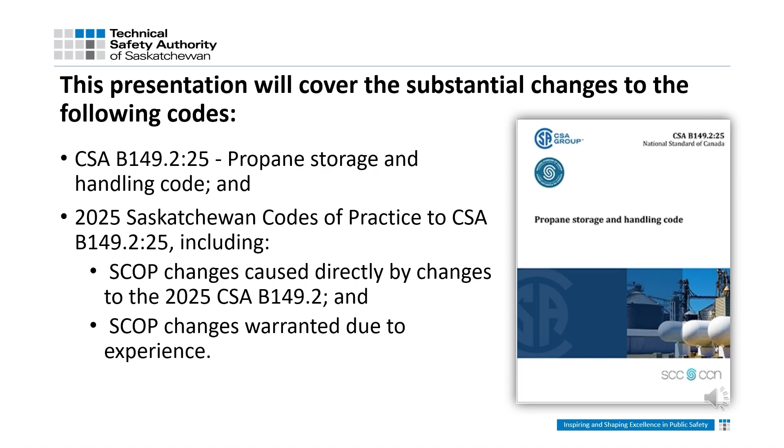Once again, like the presentation for the B149.1, the .2 presentation will have slides for national code changes with a white background. The Saskatchewan Codes of Practice will have a blue background for their slides. The Saskatchewan Codes of Practice for the .2 section has also been reorganized into 2 sections. Interpretations, which are enforceable. The second section is informative, which is just good reference material that contractors find useful.

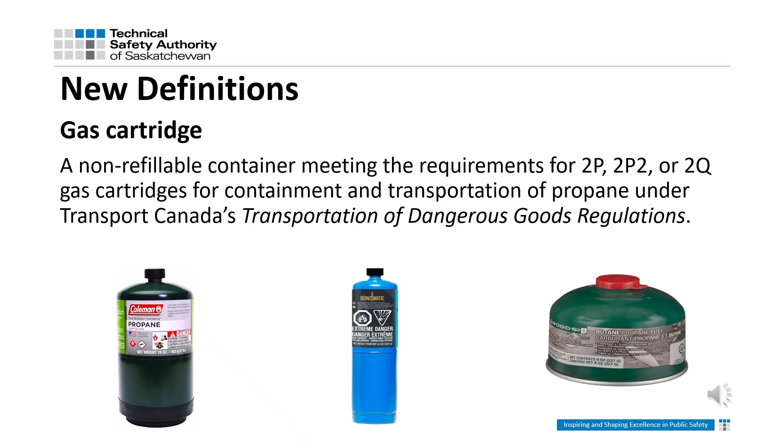Self-service vehicle fuel dispenser: a vehicle fuel dispenser for use by the public for conducting dispensing operations. Public refueling of autogas vehicles is currently allowed in Europe and is allowed in many states in the United States. Indications are predicting this will become more popular in the next few years here in Canada as well.

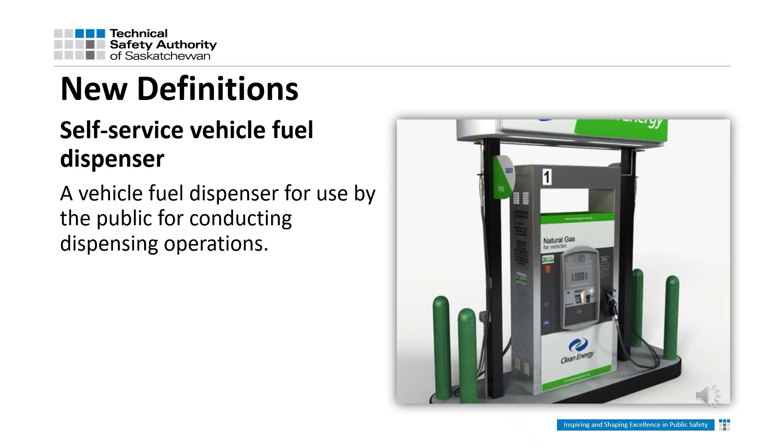Underground tanks. The previous code mentions only underground tanks, while mounded tanks are not mentioned as such, but are subjected to the same issues that underground tanks are. The new definition encompasses that underground tanks are either buried or mounded. Just a reminder that all underground tanks need approval from TSASK gas inspections prior to installation.

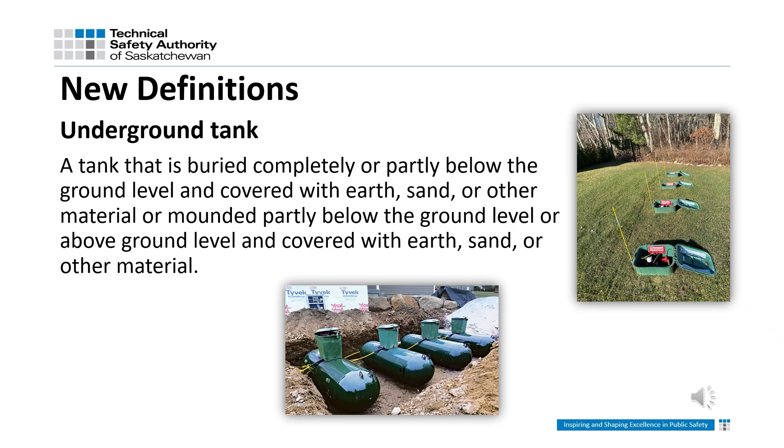Section 5. General requirements for propane and propane equipment. 5.12.7. Vehicles equipped with propane appliances shall be allowed indoors of a repair garage when A. The garage has personnel trained on site in the repair and maintenance of vehicles equipped with propane appliances. B. The propane tanks are shut off except when the propane is required for testing purposes. Vehicles parked or stored in the garage while unattended need to meet clause 5.12.6, which has you remove the propane tanks or be below 50% capacity, all valves shut off, and parking facility is approved for this use.

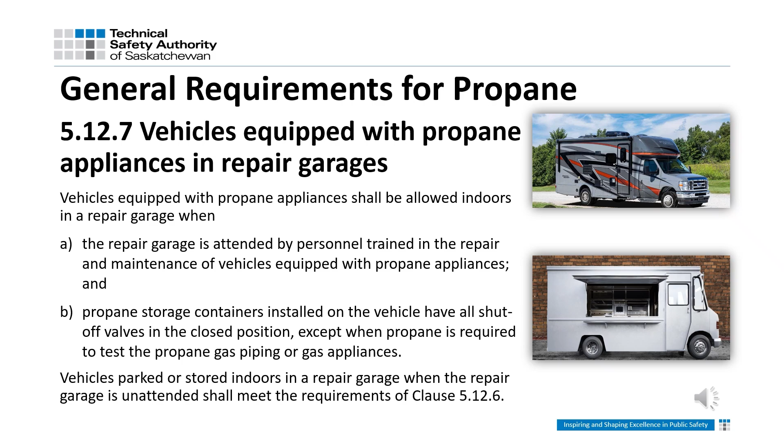Food trucks, trailers, and carts need to follow Annex J. For everyone building or working on mobile outdoor food service units, Annex J in the B149.1 code is mandatory in Saskatchewan. This is to align the requirements for mobile outdoor food service units in the province.

Section 6. Cylinder systems. 6.5.1.3. Dwelling unit storage. Not more than 3 containers, cartridges, or non-refillable cylinders manufactured to TC39M shall be stored in a dwelling unit. Here are some common ones that you will see. This is good information to pass on to your customer for compliance.

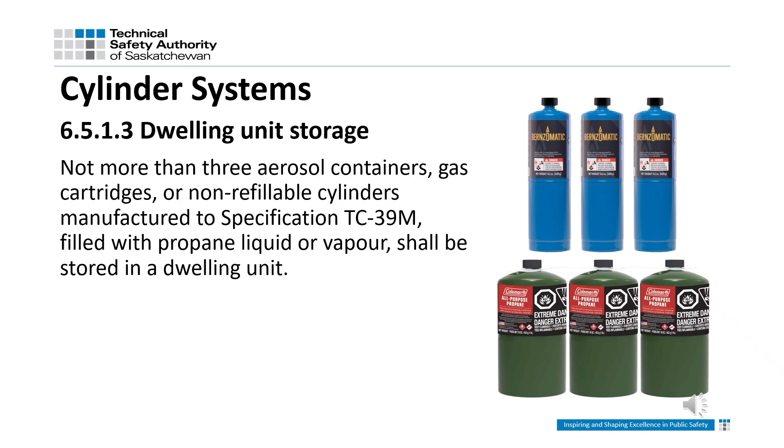6.5.2.4 was reworded and clarified to align with the National Fire Protection Association 58, also known as the Liquefied Petroleum Gas Code. Part C has a change from property line to line of adjoining property. The intent stays the same.

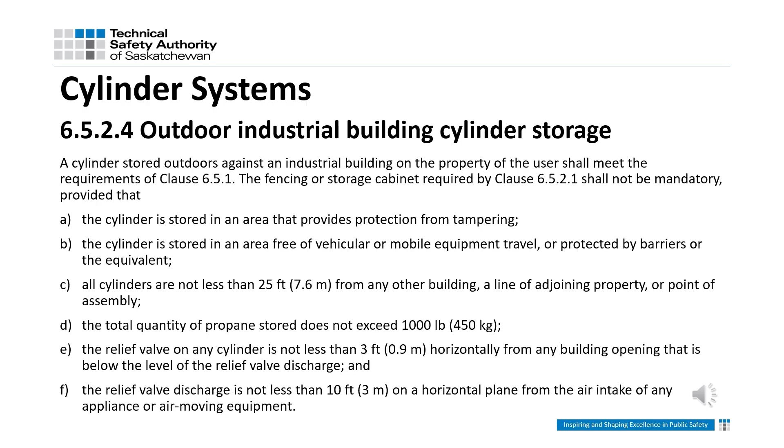6.5.3.9 is for cylinders during construction. They can be located below grade in a 1 or 2 family dwelling or in row housing. The area needs to be well ventilated with no source of ignition within 10 feet. Installed on a level, non-combustible base that is solid. With this clause, it is not acceptable to use a cylinder set on a wooden pallet in a hoarded-in basement with a construction heater to thaw the ground.

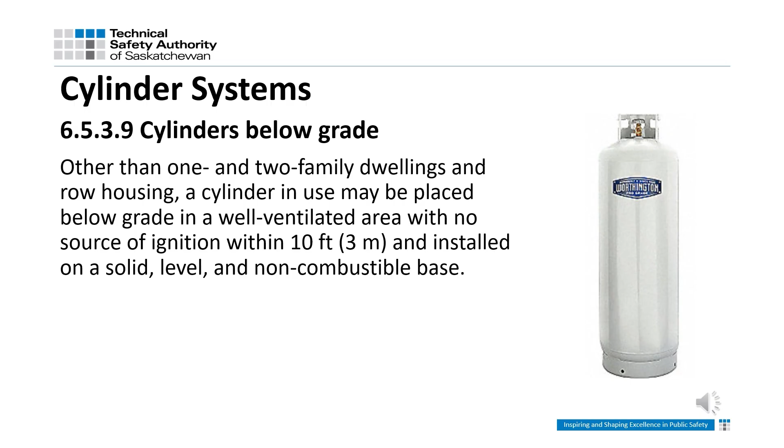6.7.4, below grade. This is a wording change that adds the term except as specified in clause 6.5.3.9. This code gives the requirements if a cylinder is to be installed in a niche in a slope or a terrace wall, provided the cylinder or regulating equipment are not in contact with the ground. B. The compartment or recess is drained and ventilated horizontally outdoors from its lowest level. And C. The discharge outlet from any relief is located 3 feet horizontally from any building opening that is below the level of such discharge outlet.

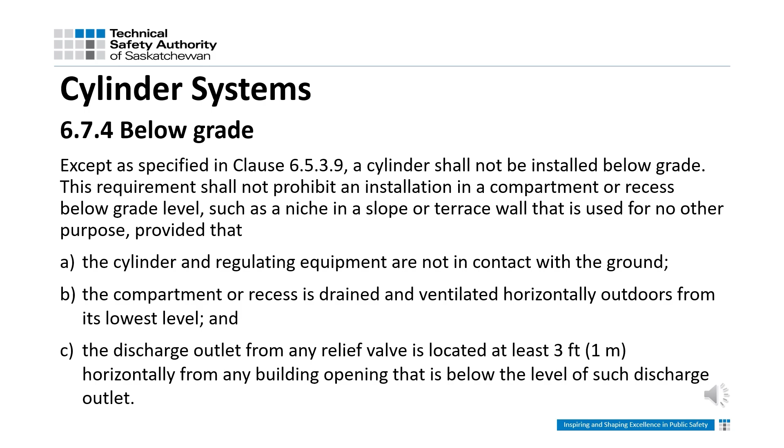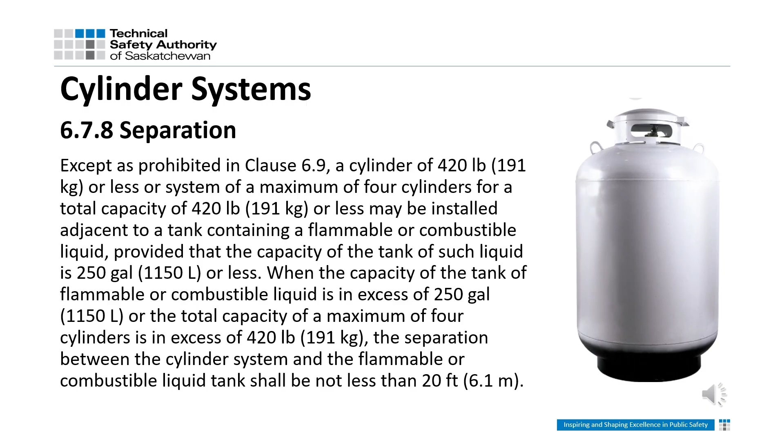6.7.8, separation, is a clarifier to 7.1.8 for tanks. It states that you can have a 420-pound pig or 4 100-pound cylinders manifolded together adjacent to a fuel tank of 250 gallons. But if the fuel capacity of the fuel tank is over 250 gallons, or the aggregate of the propane is over 420 pounds, then you need a separation of 20 feet between the two. This is something you need to be aware of on construction sites, farmyards, or anywhere flammable or combustible liquids may be stored. Section 7. Tank systems, filling plants, and refill centers.

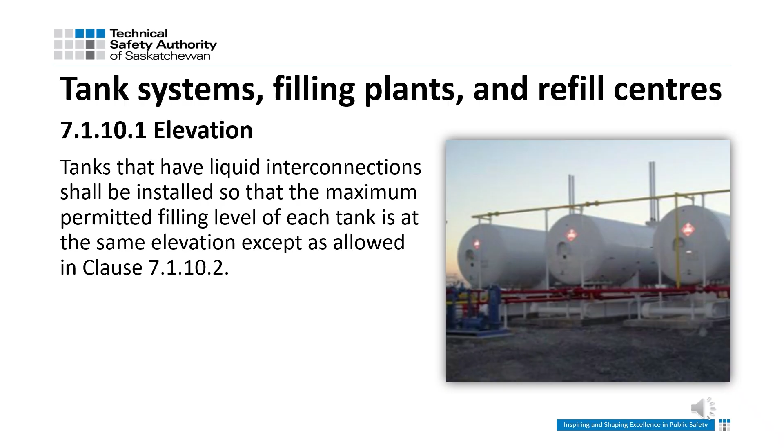The next 3 clauses are a breakdown and clarification of existing codes that fall under 7.1.10, interconnected tanks in liquid service. 7.1.10.1, tanks that have a liquid interconnection shall be installed so that the maximum permitted level of each tank is at the same elevation, except as allowed in clause 7.1.10.2.

7.1.10.2. Container evacuation at a filling plant. This is the exception to the previous clause. The tank used to evacuate containers may be at any elevation provided a backflow prevention device is installed in the liquid service between the main storage tank and the evacuation tank.

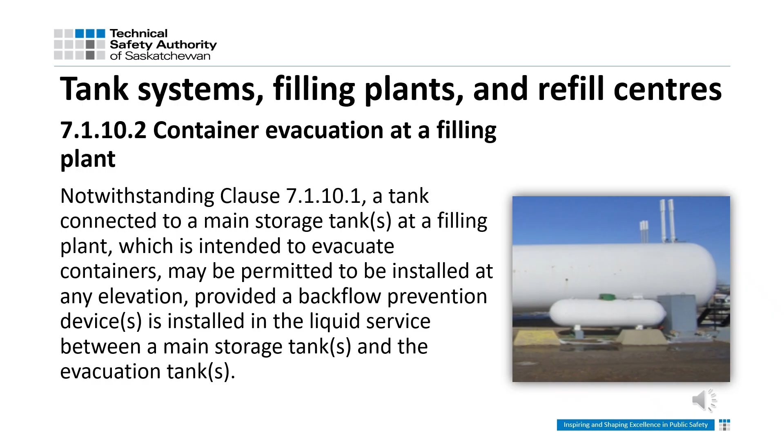7.1.10.3, vertical tank restrictions. This has been a long time restriction in the code, but it has been moved into its own subclause to help clarify. Vertical tanks used for liquid cannot be manifolded to a horizontal tank or to a vertical tank of different dimensions.

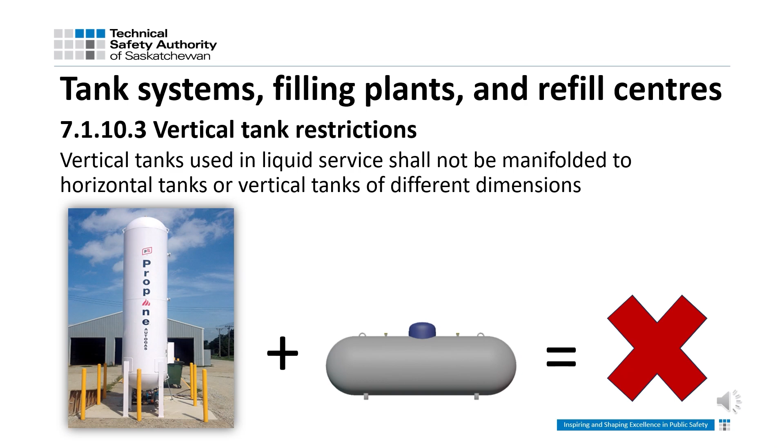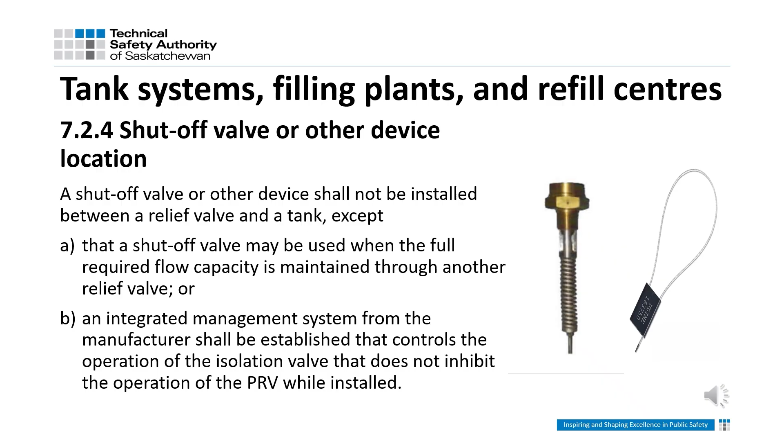7.2.4. Shutoff valve or other device location. This code aligns the B51 boiler code with the B149.2 for better consistency in industry. Shutoff valves cannot be installed between a relief valve and the tank unless A, you have a second relief valve that maintains the full flow capacity required for the tank, or B, an integrated management system from the manufacturer shall be established that controls the operation of the isolation valve that does not inhibit operation of the pressure relief valve while installed.

7.8. Installation of underground tank. 7.8.1. General. An underground propane tank shall only be installed in accordance with the manufacturer's installation instructions and clause 7.8. Like everything in the industry, follow the manufacturer's instructions, and clause 7.8 lays out national requirements like cathodic protection on the tank, corrosion control and monitoring, tank flotation prevention, and much, much more.

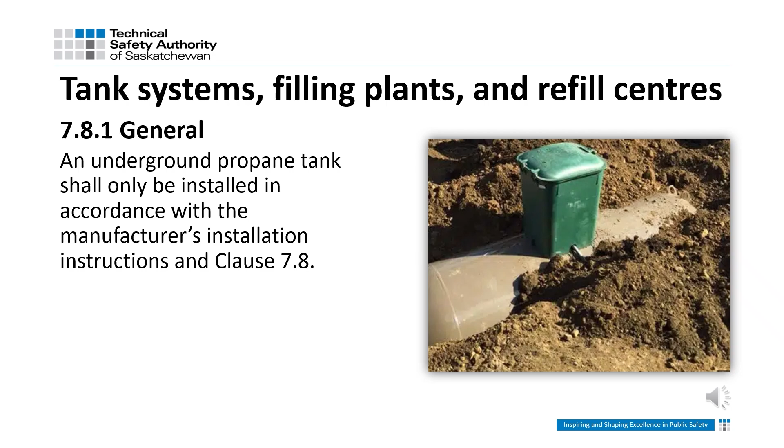Remember to contact your local inspector or Brent at Codes and Standards during the design portion of the job to get the necessary approvals. Plus, you will need to contact TSASK boiler and pressure vessels for their requirements to bury a pressure vessel.

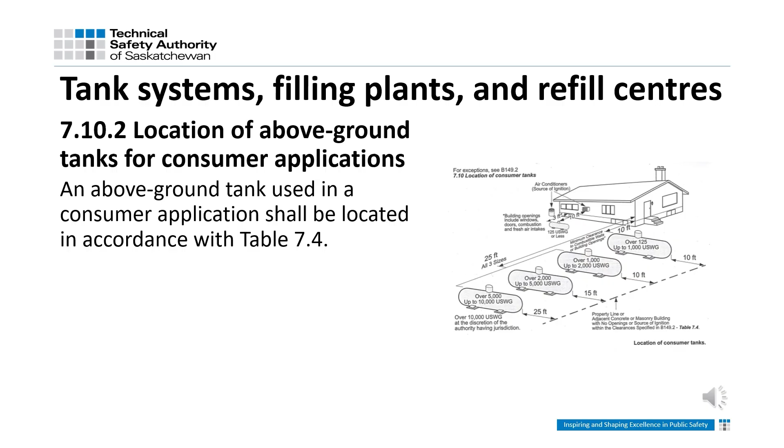7.10.2 Location of above-ground tanks for consumer applications. An above-ground tank used in a consumer application shall be located in accordance with Table 7.4. This clause was simplified and reworded to deal with the basic requirements that they need to meet Table 7.4.

7.10.3 Clearance for consumer tanks less than 125 U.S. water gallons. This code was renumbered and reworded, but the intent has not changed. You can have 4 20-pound pigs manifolded together against a common wall of a building. If you install a second bank of tanks, they need to have a 10-foot separation. And B, when you have tanks of different sizes manifolded together, the largest tank shall determine the minimum distance as per Table 7.4, not the aggregate of all the tanks.

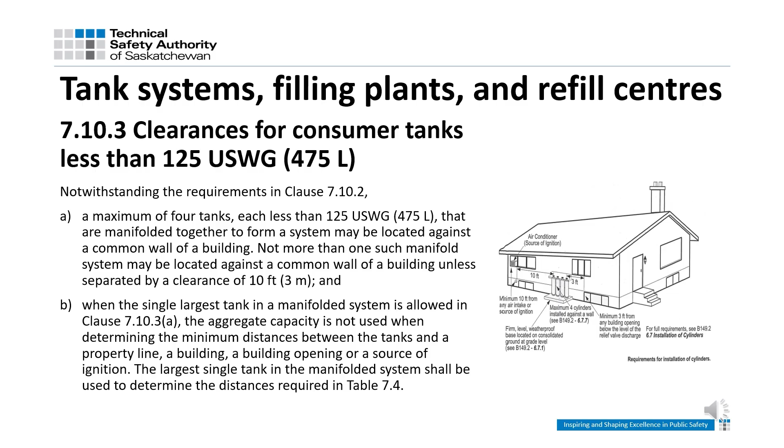7.10.4 Clearances for consumer tanks over 125 U.S. water gallons. This is a wording change, but the intent stays the same. Part A allows for a reduction in clearances for tanks over 125 U.S. water gallons up to and including 500 U.S. water gallons to be reduced to 3 feet if they meet the requirements of 1, 2, and 3.

Just a note for Part 1, ICF block walls do not qualify for this requirement as the block itself is not non-combustible. For Part B, if the wall is built of material other than concrete or masonry, clearances may be reduced if the protection is acceptable to the authority having jurisdiction, which is TSASK. So talk to your local inspector or Brent with Codes and Standards.

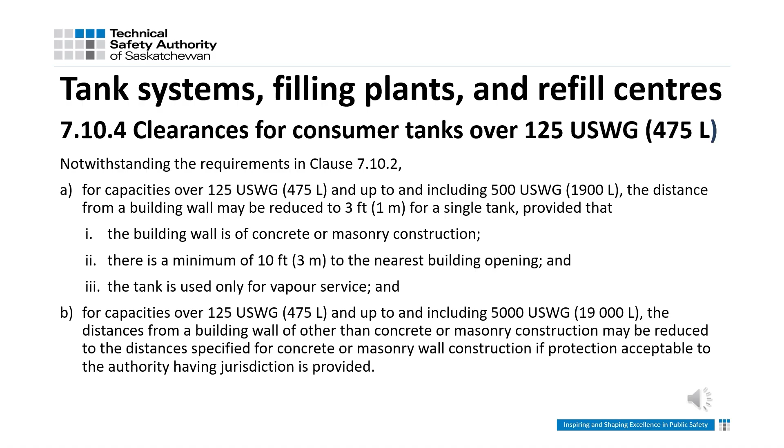We've been referring to Table 7.4 throughout this section. Just a reminder that this table is based on the total aggregate and not just single tank capacity. This is a good time to review the common size of a 1,000 U.S. water gallon tank. 10 feet from property line, building opening, source of ignition, and building wall.

These requirements make it difficult to set a tank at a recreational property in the province. Now the most common installation I see is 4 20-pound pigs manifolded together beside the cabin. This installation meets the requirements for clearances in Table 7.4.

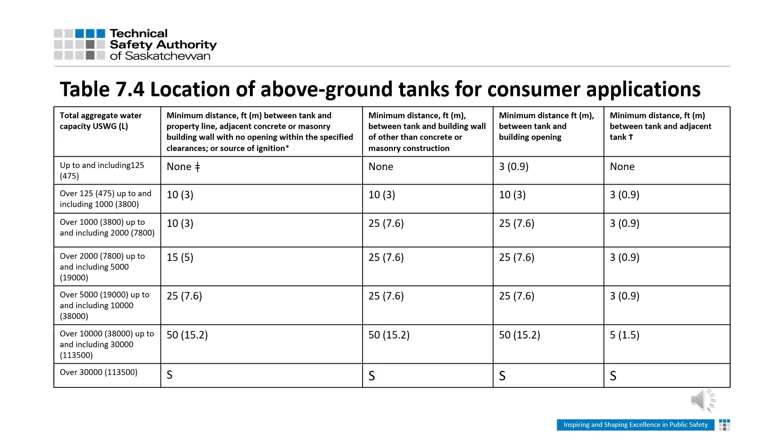7.20.14 Self-Service Vehicle Fuel Dispensers. This is a new section for the 2025 code cycle. Point 1 of this clause takes away the requirement that in this application the person needs to hold a certificate from the jurisdiction having authority. Point 2 says that the dispenser needs to be certified to UL 495 or CSA 12.4. Point 3 gives a specification for the nozzle to ISO 19825 for a Type K15.

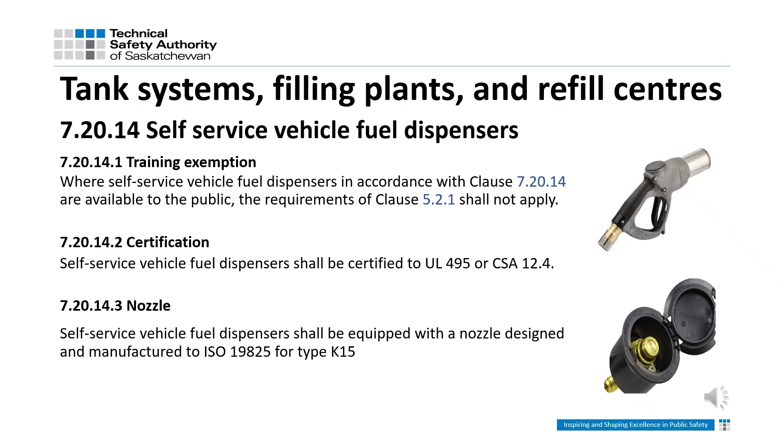Continuing to point 4, emergency instructions shall be posted conspicuously in the dispensing area. Point 5, emergency shutoff needs to be at least 20 feet away, but not more than 100 feet from the dispenser. And finally, point 6, the outlet pressure shall not exceed 350 psi.

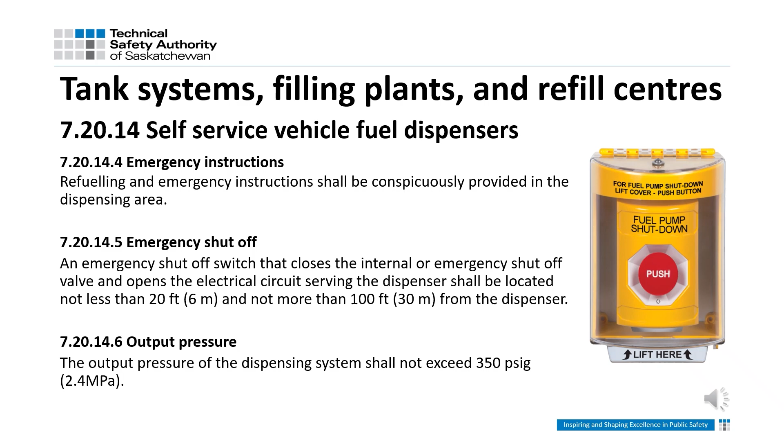This concludes the presentation for the Part 2 code.